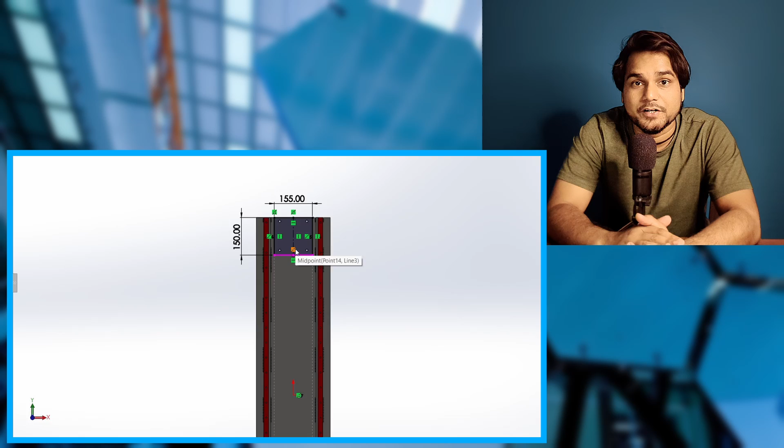Also, we will learn how we can relax the manufacturing tolerance of a ball screw linear actuator to cut down the manufacturing cost, because maintaining a close manufacturing tolerance for a long linear actuator base plate like 1 meter is challenging. And on top of that, we will learn how to design, or we can say where to design, a customized coupling, or we can say floating joint, for a ball screw in a linear actuator.

And now we are in Solidworks, and these are our linear actuator components as far as we made the selection and design.

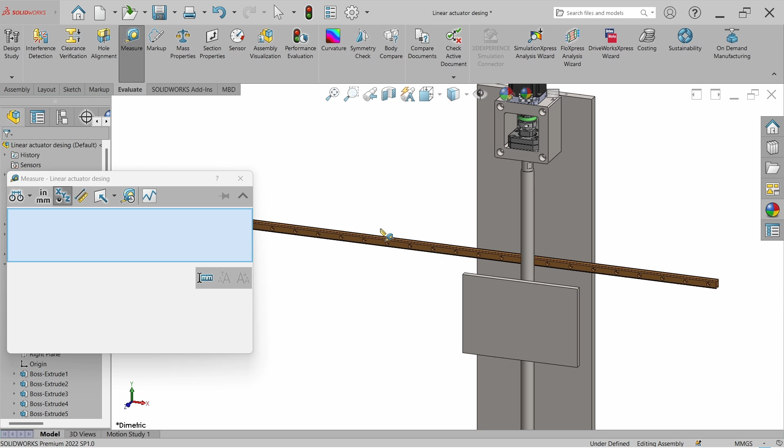And now let's bring the LM guide and blocks. So go to the assembly, go to insert component and select LM rails and bring it into the assembly. And here I have downloaded the rail length 1420, and I have considered some extra length.

Why? Because I wanted the last hole of the rail to be at the same distance from the sides. This is 20 mm, and also at this side this mounting hole is at a distance of 20 mm from this side. And the benefit will be we can mount this rail in both orientations, like this or like this, and this is just a very small advice.

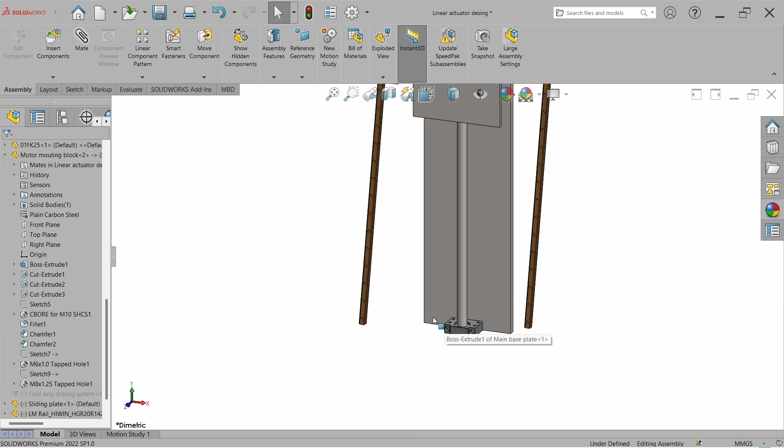And now let's make a copy of it because we are going to use two rails. And now let's bring the LM block right here, and let's try to assemble this linear motion guide and block into this assembly. So we have to mount this rail with the base plate, and we have to mount this LM block with the sliding plate.

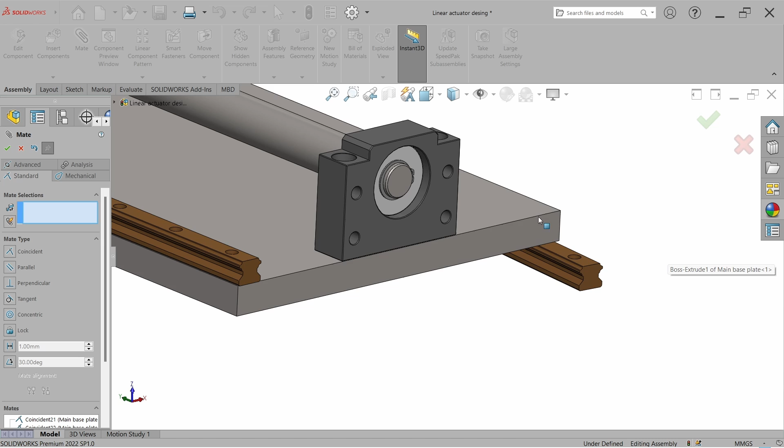So go to mate and select the top face of the base plate and select the resting face of the LM guide and hit OK. Just position it. So just temporarily I am mating this and hit OK. Also do the same at this end. Also temporarily mate this, just one block, but there is a gap.

And we cannot bring this sliding plate down because this sliding plate is to be mounted with this ball screw nut, something like this. So there are two options. The first option is we can bring the LM block down and assemble it with this rail, and we can design a spacer here, something like this, at both sides. And the second option is we can mount this LM guide at the top, and to do that we have to design a spacer below the LM guide. Another question is which option is better.

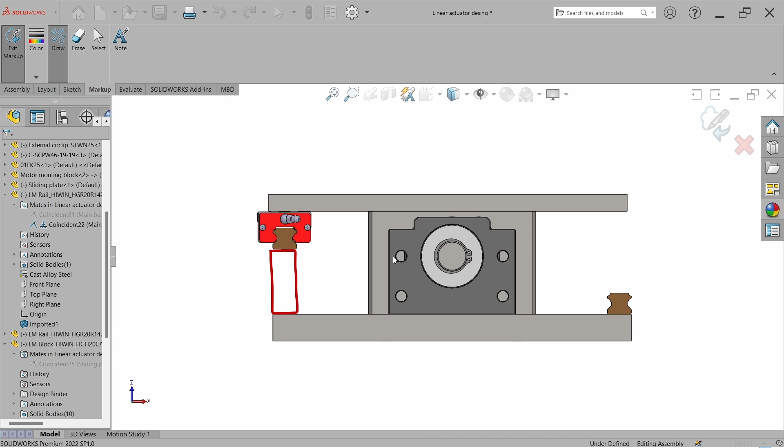So first let's try to understand it. As the first option is, we will design a spacer right here above the block, mount the sliding plate with this spacer and mount this LM block with this spacer. So what is happening here, we are increasing the cantilever distance from the load, and it will apply a high amount of moment over this LM block that can reduce the life of the LM block.

And now let's look at the second option. The second option is we have to design a spacer below the LM guide. And when we do that, the cantilever load will be minimum and it will apply the minimum moment over the LM guide block. So we will go with the second option. We will design a height spacer below the LM rail.

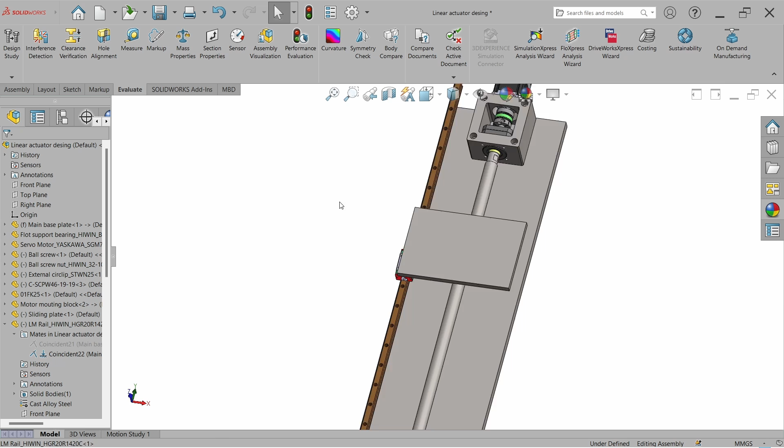So how to design a height adjustment spacer, or we can say height adjustment block, for the linear motion guide. There are a variety of methods to mount the LM rail with the base plate. You can check out the catalog for more detail. But in general, we will design the height adjustment block something like this.

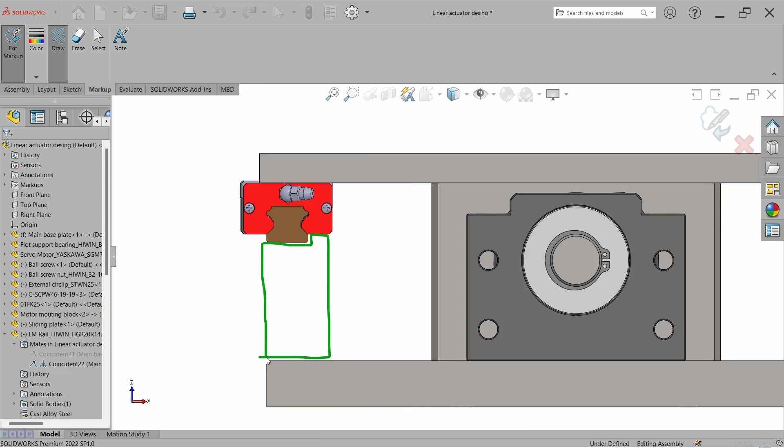We will maintain this resting height to the base plate very accurately, and we will give an edge here, something like this, so that we can mount this rail by butting it on this edge.

So that we can accurately maintain the distance between both LM rails. I hope you get my point. Otherwise, if you will not use that kind of height adjustment block, maintaining a high accuracy parallelism between both linear motion guides will be difficult, because the LM guide does not come with dowel holes, it comes with clearance holes.

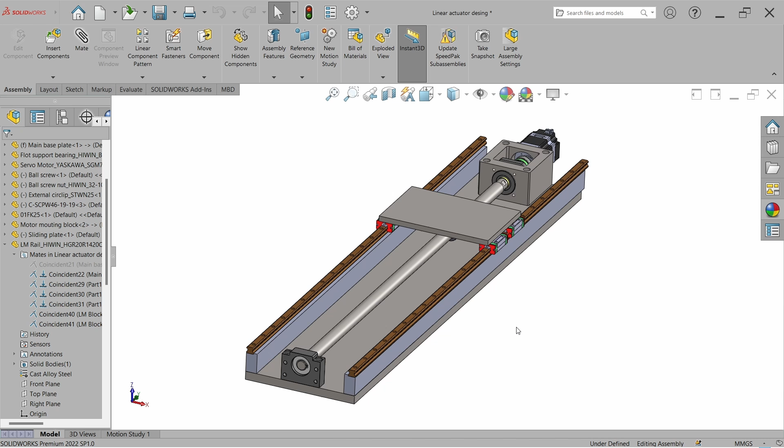And there is one more thing. When we design that kind of height adjusting spacer block, we will need to mount this block with the base plate using dowel pins. Otherwise, the distance between rails will not be accurately controlled. Or we can make the cut like this and place the height adjusting block against the edges.

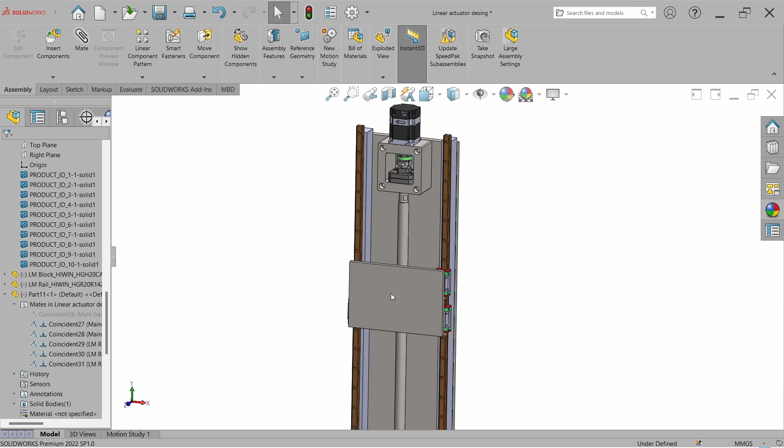And these two methods are costly because the length of the LM guide is more than a meter, and machining such a height adjustment block in one part is difficult. However, we can divide this height adjusting plate into multiple parts, but again, the cost will not reduce. So now let's talk about the solution.

And the solution is, instead of using these separate blocks, first we can weld two simple bars without machining over this base plate at both sides. Something like this. There will be a welding. Also, we will do the welding on this side. And these blocks are just raw blocks. There is no machining. We don't have to do any machining on this plate before the welding.

And after the welding, we will place this welded structure on a milling machine or VMC machine, and then we can machine this edge in one setup. Makes sense? In this way, we don't have to use any dowel pin. We don't have to use any edge step here on the base plate. Also, we don't have to machine every part individually. We just have to first weld these parts together and then machine only the resting part of the LM guide.

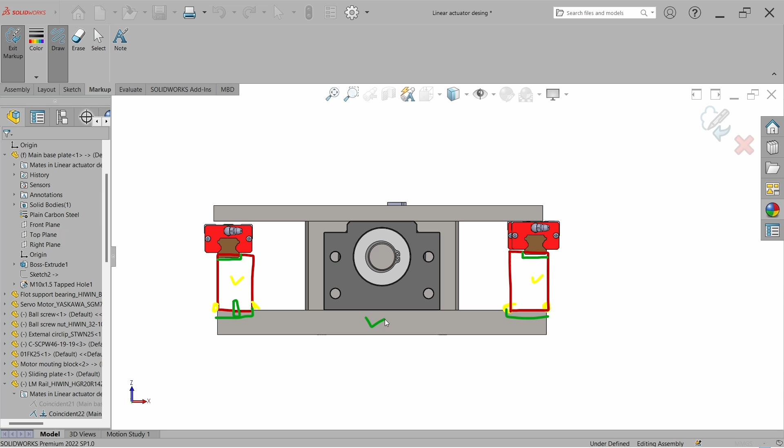So now let's try to make this base plate with these welded bars. Just open the base plate. As for the mounting holes we did in the previous part of the series, we don't have to do it before welding. Just for demonstration, I'm suppressing this. Now take a sketch on this plate, go to the corner rectangle tool, and start from the top and end it at the bottom at both sides.

And now go to the smart dimension and set the width of this plate to 30 mm. Why? Because the LM width is 20 mm, so we can leave the edge width to 10 mm, or you can go for 28. It's all up to you. And now just make them equal.

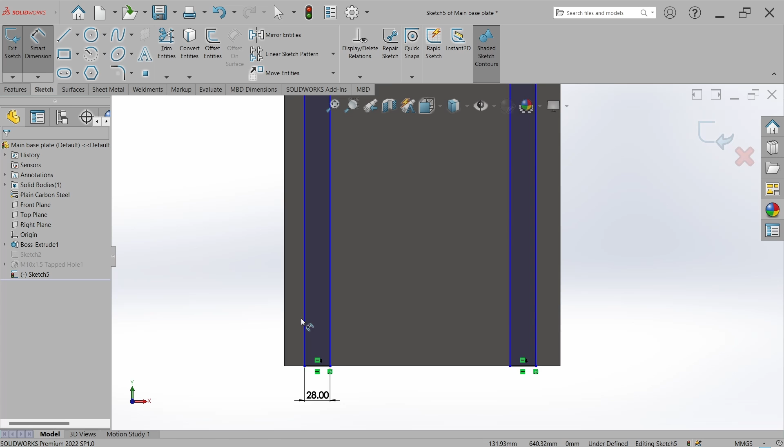Now, we have to leave some space here so we can weld the edges from both sides. Also, we will make the mounting bolts on this base plate so we can mount this whole system on a structure. So go to the smart dimension and set this gap to 30 mm. It's up to you, and again set it to 30 mm.

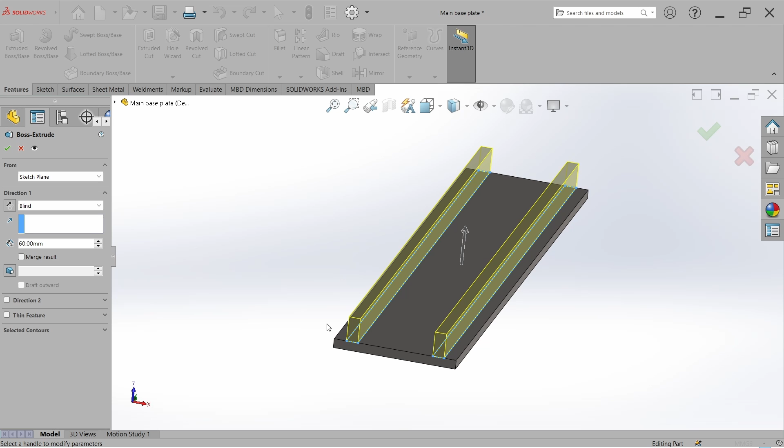Close the sketch, go to features, extruded boss, and set it to blind. For now, I am taking it to 60 mm. We will adjust it later. And here, just uncheck merge result. Otherwise, it will seem like the whole part is manufactured from one raw material. Now hit OK, go to weldments and select weld bead.

Here, select the faces, or you can check both sides, so you will get the welding on both sides. Here we can set the welding size. This is 5 mm, but I don't want continuous welding. I want intermittent welding. So check intermittent welding and pull this bar down. Here we can set the welding length and the gaps. I'm setting the welding length to 50 mm and the gap to 100 mm.

Or you can increase the welding length. Go for 100 and hit OK. But the welds are not showing, so go to the eye button and click on view weld beads. And now the weld beads are showing. Now we have to repeat the same process on this side.

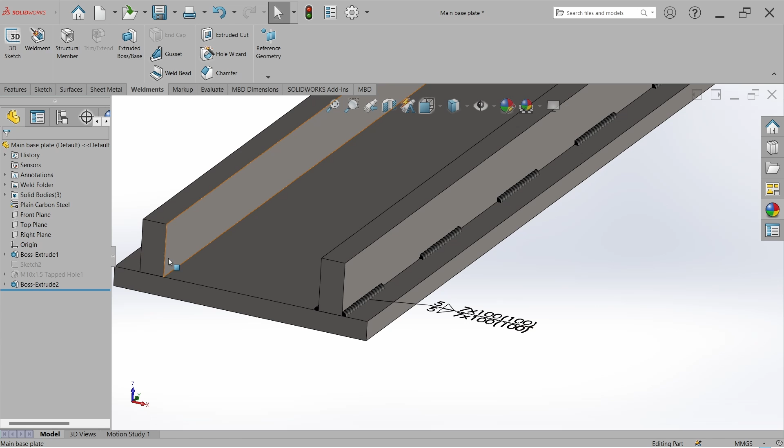But the welding symbols are looking crazy, so double click on it. This is the welding size, this is fine, but this is not a good representation, so take it like 100-100. Also the other side, 100-100. 100 is the length of the welding and 100 is the pitch. You can also change the welding type. This is fillet welding, which is okay for me, and hit OK.

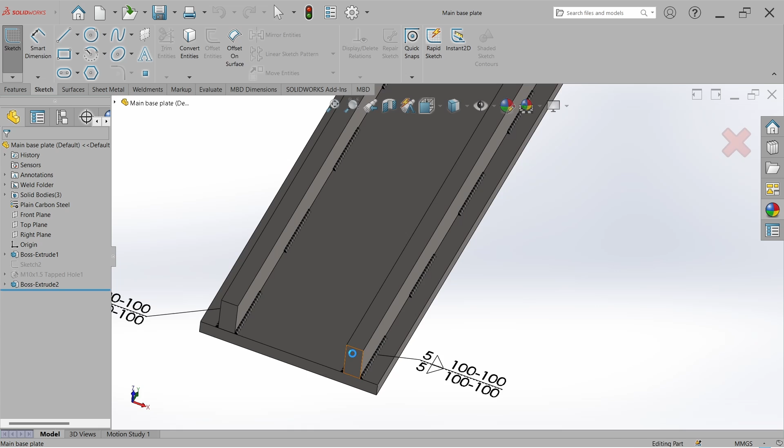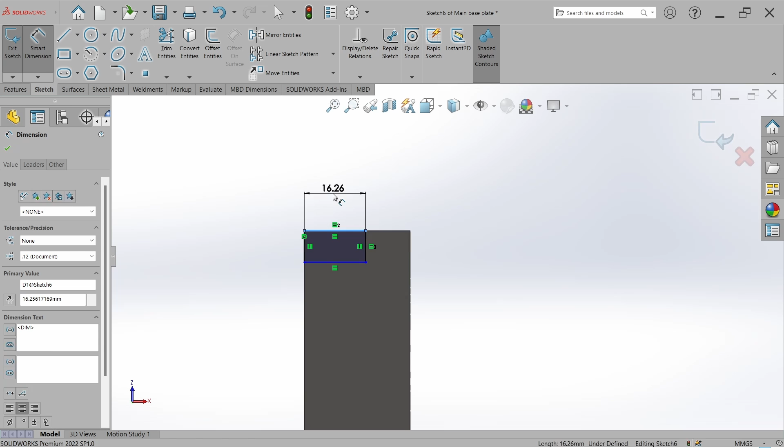Now go back to the assembly. Let's make a step cut here and mount this rail onto the step. Open it, select the face for a sketch, go to the corner rectangle tool, start from this corner, and the same from this corner, and make them equal because they have to be equal. Also make the depth equal, set the length to 20 mm. You can take some extra, it's up to you, and set the depth to 3 mm.

We will check it and adjust it. Close the sketch, go to the feature, go to the extruded cut and set it to through all and hit OK. And now just for identification, I am just changing the color of these faces to red. So it will be an identification that this surface is to be machined, and hit OK.

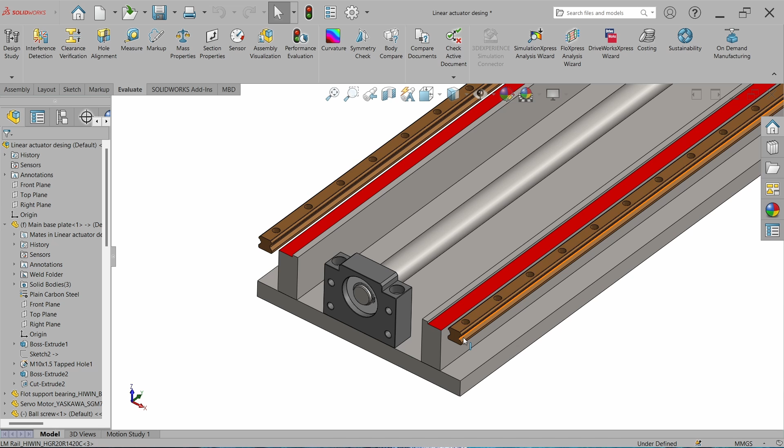And now we can make the mounting threaded holes for the motor mounting block. So here I am just unsuppressing it. And now let's go back to the design. So now we have to mount this rail over this face. So let's first temporarily mate it. So go to the assembly, select the mate and select the faces, coincide this, also coincide this edge and also coincide these faces and hit OK.

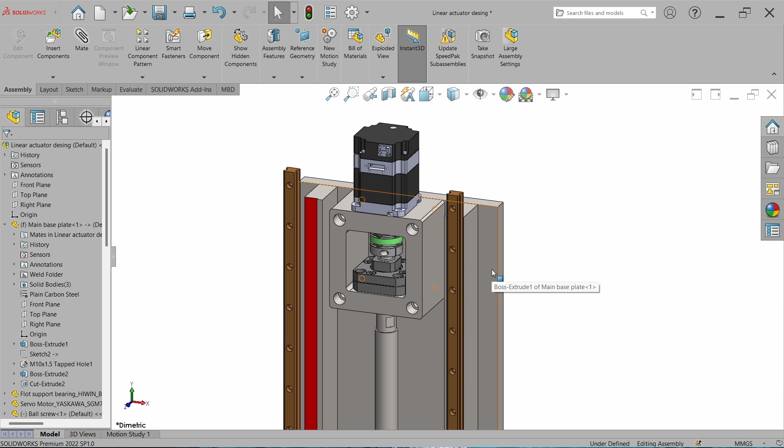And now this rail is extra, so what we can do, we can increase the overall length of this base plate. So first let's measure it, and this is 37 mm. So just double click on it and click on the dimension and add 37 mm and rebuild it. And now there is a problem. The motor mounting plate has been shifted, and there are two problems. The first problem, we have not applied the mate in the mounting holes, and the second problem is the length of the ball screw. We have to extend the length by 37 mm.

So first let's try to mate it properly. So I'm just selecting the part, go to the mate property, and here this mate is the motor mate. This is also for the motor. This is for the parallelity. So let's delete it. We will mount it with the holes. And this mate is for the bearing block. This is also for the bearing block. And this is the parallel mate. We can delete it and we will mate it with the mounting holes. And this is okay. This is also okay.

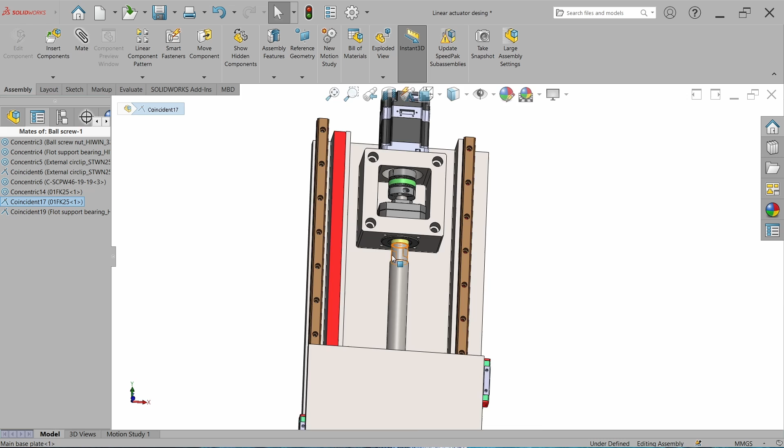Select the ball screw, go to the mate and check it. And this is the face where this is mated. So just temporarily suppress it. And now we can move it around. And now go to the mate and first mate this. Okay, and also mate this hole. We need to mate at least 2 holes. Hit OK. And when we mate, this hole has been shifted.

Why? Because this hole was made from external reference, and you can also see this symbol. This symbol is for external reference, and sometimes it might be a reason for making mistakes. So always try to make the holes with the external reference and then break the external reference and give them dimensions. So let's try to do it. So as we know, this hole is started from this face at a distance of 15 mm. So what we will do, we will open the part and go to this sketch, select the sketch and edit the sketch. And now we can see these points are external reference.

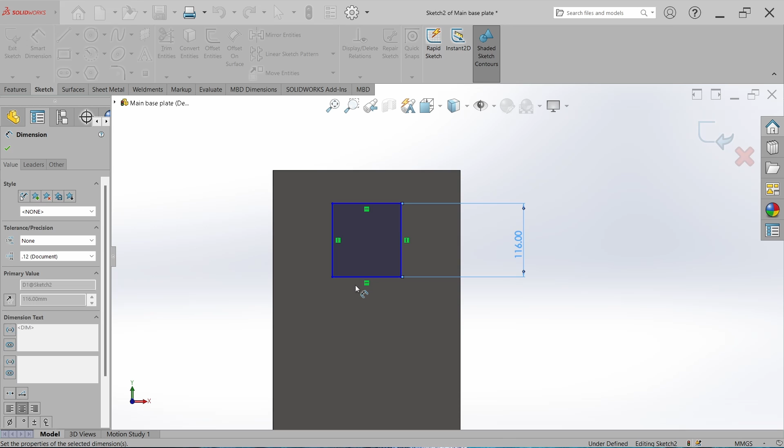So first just delete the points. Okay. And now go to the smart dimension and first set the dimensions as it is. You don't have to change anything. And now go to the line and select center line and start from this center point and mate it with the center point. And now again go to the smart dimension and now set it to 15 mm. And now close the sketch. And now there was an arrow and now this is removed because there is no external reference. Go back to the assembly.

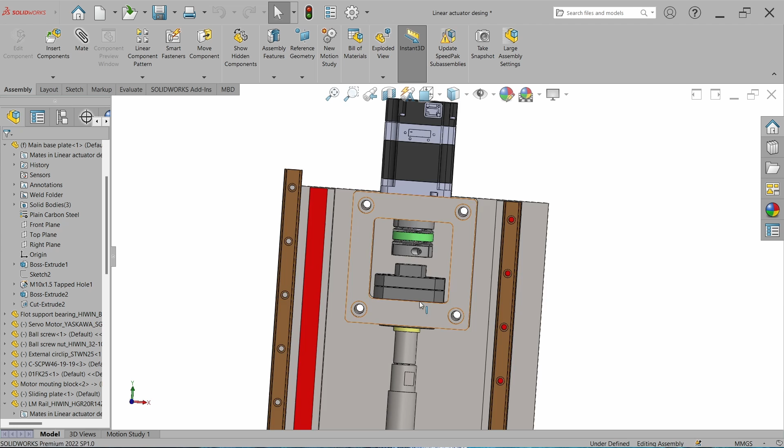And now this is perfectly fine. And now just try to move it. This will not be moved because this is completely constrained. And now we can also constrain these things. So go to the mate and select the holes. Hit OK. Again do the same. And now these parts are completely constrained. And now we have to increase the length of the ball screw. So just double click on it and select the dimension and plus 37 mm and just rebuild it. And now this is perfectly fine.

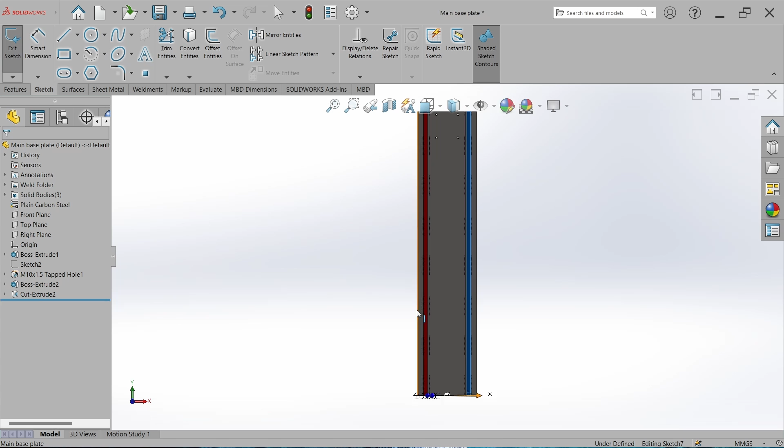And now we have to mount this rail over this plate. So just open it and go to a sketch. And if this is disturbing, you can just hide it. Right click on it and hide it. Okay. Now go to the sketch and select this face and go to the center line and start from the middle because the width of this face is the same as the width of the LM rail. If it were not, then I would start by giving the distance from this edge because we have to align the guide with this edge.

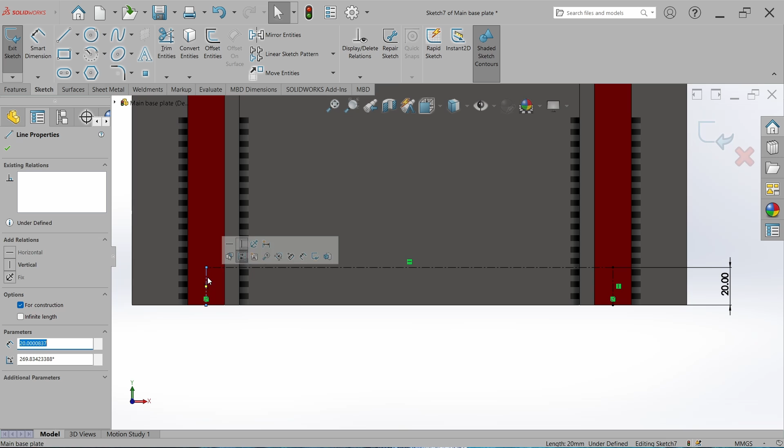And now we can set the distance of 20 mm. 20 mm is the distance of the first hole of the LM rail from one side, and make this vertical. Go to the sketch, go to the feature, go to the hole wizard, and the size of the mounting hole of the rail is 6 mm. Clearance hole diameter is 6 mm. It means we have to use an M5 bolt.

So go to the threaded hole and select the thread size M5, pull this bar down and select it to blind, and set the depth to 20 mm and thread length to 16 mm. Go to the position, 3D sketch, just mark the location and hit OK. And now just hide the sketch.

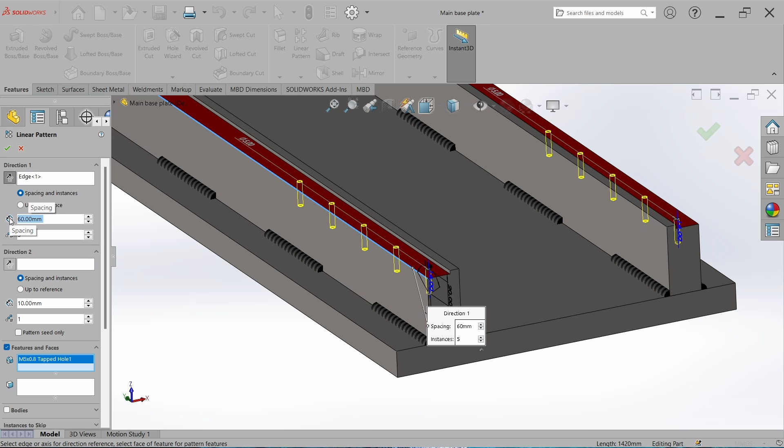Go to the linear pattern and select the pattern direction. I'm selecting this edge. Go to the feature and select the threaded hole. You only have to select one threaded hole because we made both holes at the same time. And now we have to set the pitch of the LM guide mounting holes, and LM guide mounting holes generally come with 60 mm of pitch. And now we can just increase the number of holes, and this is OK, hit OK.

Now just go back to the assembly. Select the part, go to the property, and you can just delete the temporary element, and just try to mate this with the mounting holes. So go to the mate, select the clearance hole and the threaded hole and hit OK. And now we have to mate one more bolt and we can rest it properly. This is cool. And just repeat it on the other side also.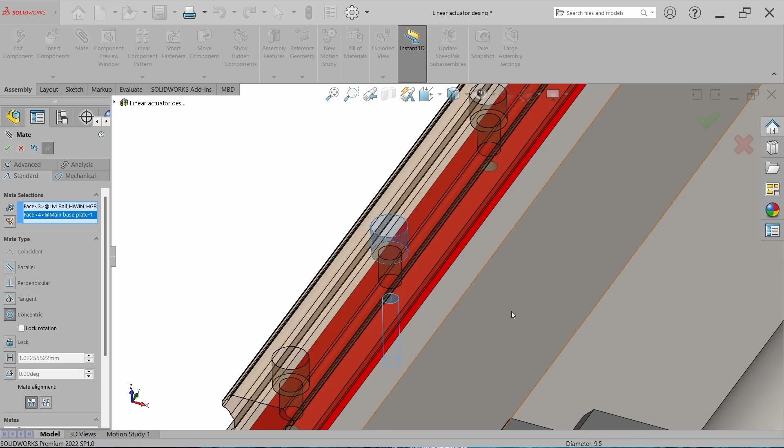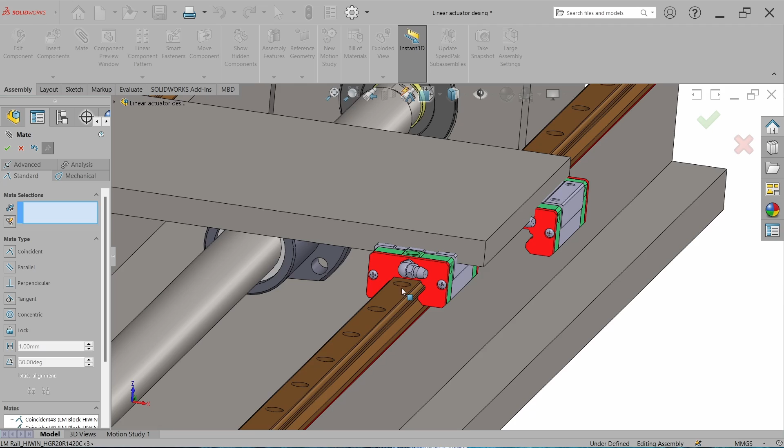And now let's try to mate this mounting block onto the rail. So go to the mate and select the top face and the top face of the rail, and one of the side faces, and mate it with the appropriate face and hit OK. And now just repeat the same process for all the blocks.

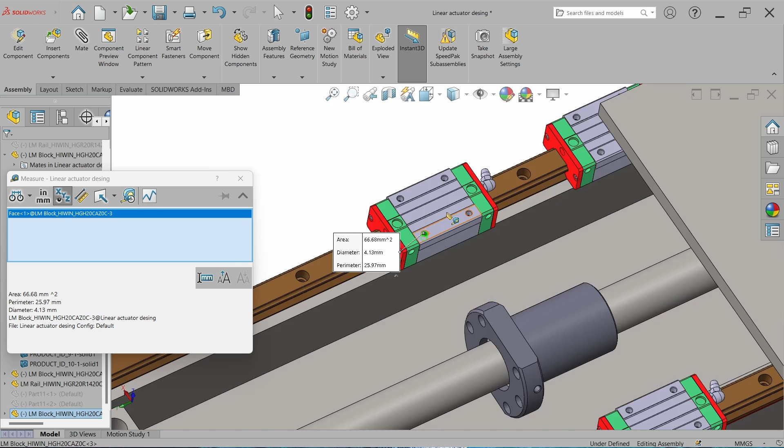And now we have to mount these blocks with this sliding plate. So first let's measure the mounting CD and the size of the threaded hole. The threaded hole size is M5 because the diameter is 4.13 mm. We can also check the catalog. And the center distance from one hole to the other is 32 and this one is 36. And from one side this is approximately 20, and from this end side to this end side, the distance is 188 mm.

So let's open this part, go to the sketch, select this face, and first take the center rectangle tool and start from the origin. Now select the complete rectangle and convert it into construction lines. Now go to the rectangle tool and select the corner rectangle tool. Oops. And start from the corners. Now make the center distances equal, and make these center distances horizontally equal. Go to the smart dimension and set this distance to 32 mm and the vertical CD to 36 mm.

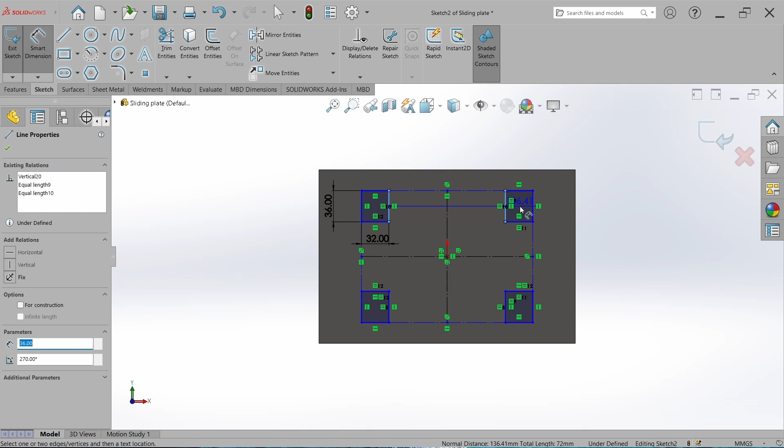And as we measured, the inner center distance of two blocks from hole to hole was 188 mm. So set it to 188 mm, and this side was approximately 20. So here I am setting it to 25 mm. This is up to you. You can set it to 30 mm also.

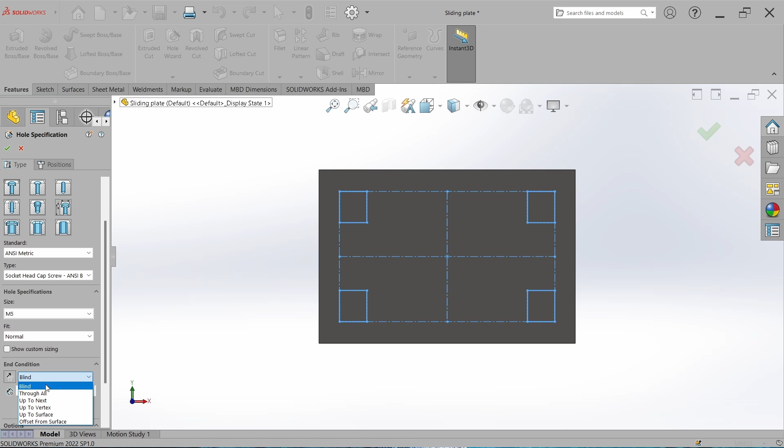Now close the sketch, go to the feature, go to the hole wizard and select counterbore. Why? Because on top of the plate we will place our drilling system, so the bolt should not be on the face of this plate. So here select the socket head cap screw, size M5 is already selected, and set it to through all. Go to the position, go to the 3D sketch and make the holes at all the corners at once. Hit OK. And now we can also add some chamfers just to give them a good aesthetic.

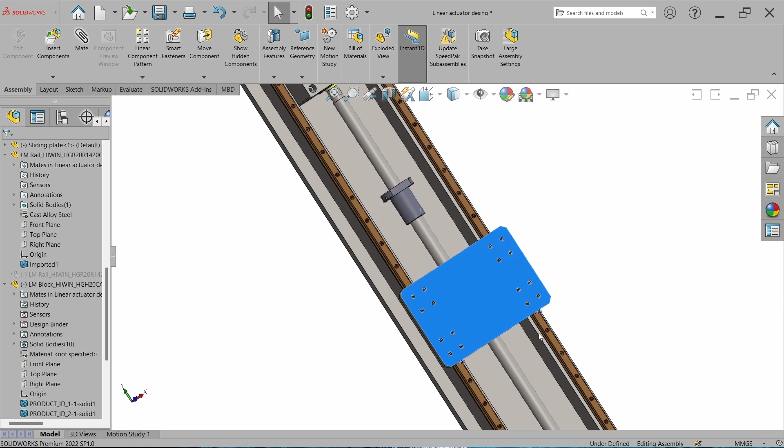And now just go back to the assembly and now we can mate this. So go to the mate and select the clearance hole and the block hole. And now have a look. This is completely fine. And here is a thing: if you assemble these blocks onto the rails and accidentally a block falls, their balls can be lost.

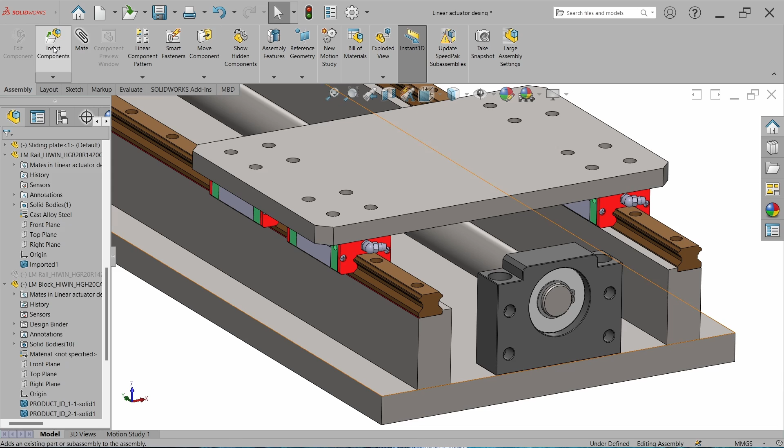So what we can do, we can add some stoppers here. To save time, I have already designed this block. This is very simple. So just go to insert component and bring the LM stopper block. We can mount this block over this height adjustment block, something like this. I'm just temporarily mating it. You can take your time, make the thread on it and assemble it.

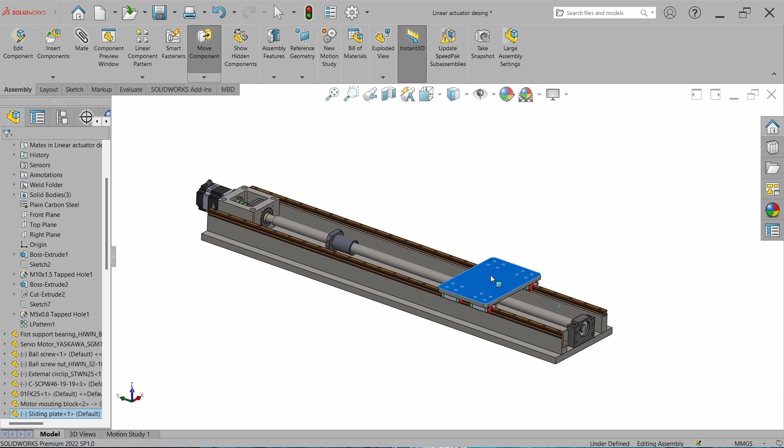In manufacturing, we have to make the threaded hole manually because we cannot make the holes of a 1 meter long block vertically. And making the hole manually in that condition is quite simple. This stopper is not for stopping the movement. It is only for preventing the blocks from coming out of the rail during assembly, because we will stop the slider with the ball screw and the servo motor. So now we just have to replicate this at all 4 corners.

And there is one more thing. To ensure that the LM rail will always align with this step, we can add the rail locking plate. Let's see how. So let's bring the locking plate. I have downloaded it. It comes in a standard size, or you can manufacture it as well. So just open it and bring it into the assembly.

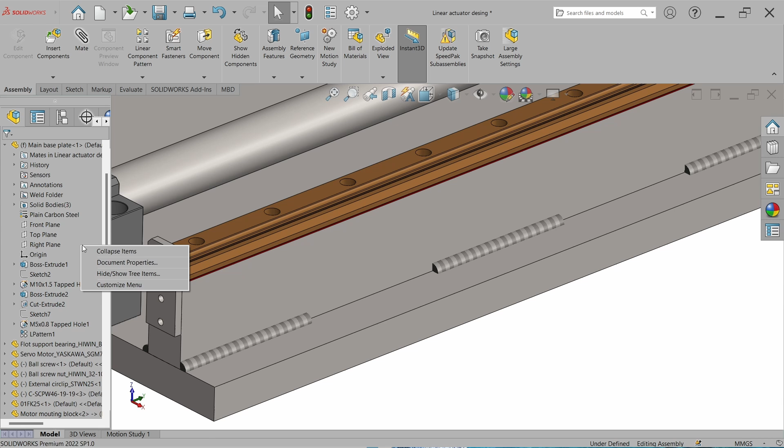And now just rotate it. And I'm temporarily mating this. Oops. Okay. Something like this. So what we will do, we will make the threaded hole over this plate and we will tighten this locking plate with the bolts.

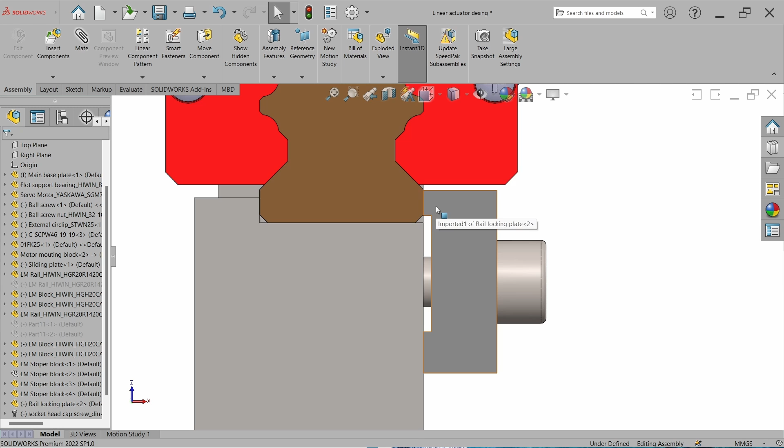Something like this. So when we tighten this bolt, because there is a cut, let me take it to normal view and just hide it for this instance. When we tighten the bolt, this block will start pushing this LM rail, and it will ensure this rail will always be aligned with this step. I hope you get my point.

And you can assemble this at a gap of 300 or 400. I'm leaving this up to you. And now I want your closer attention. As I said, we will take the raw material pieces and weld them together, and after that we will machine this step for the LM guide, and we can maintain these faces and this level in one set of machining, and also maintain the close tolerance between these steps.

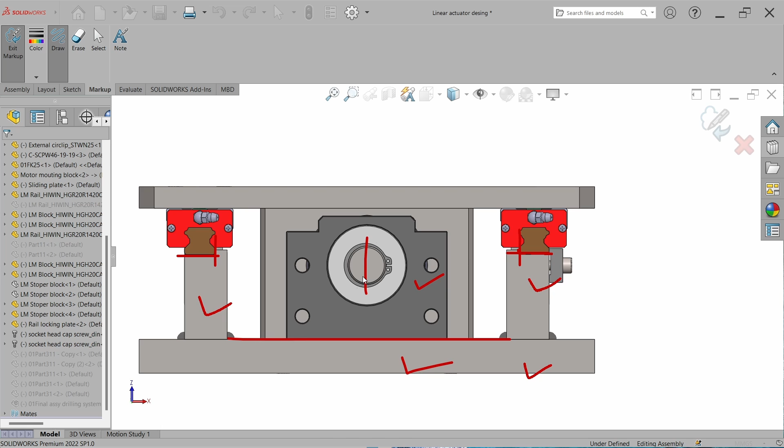This is totally fine, but there is a problem. Because this plate is a raw material plate with a rough grinding finish, we also have to machine these faces, because our bearing arrangements are mounted on these faces. So we also have to maintain the close tolerance between the ball screw center line and these faces, this face height, and the distance from the LM rail to the center of the ball screw.

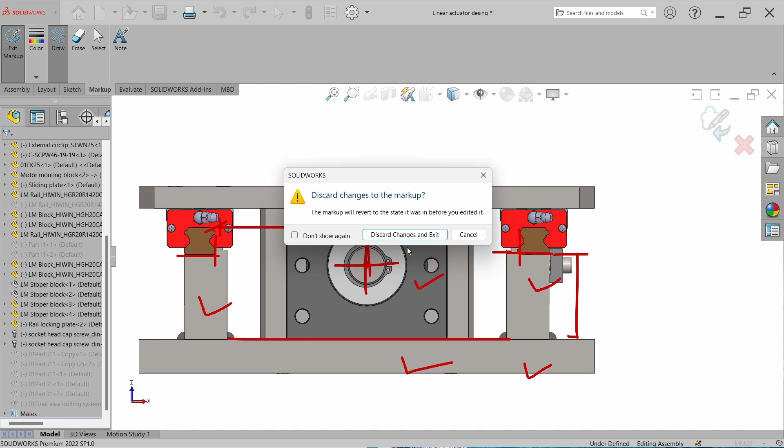So how can we do that? We have to machine the resting face. So there are two options. Either we can machine the complete plate throughout the length, or we can only machine the bearing mounting or bearing resting face, like here and also here, something like this. We don't have to machine all over the faces. So let's try to do it.

If you are a beginner, or maybe a student following my design from the start, you might get angry with me: why didn't I start the design with the welded structure, why did I first design the simple plate and change the design at the end? And I completely agree with you, because I already knew it start to end. When I was recording, the final design was on the thumbnail of the first video, meaning I recorded all 10 parts at once.

But the thing is, I'm not making this kind of video just to give you information, just to transfer the experience to you. It is not only that. I'm making the videos in such a way that you can feel the problems at every step. You will start with a very obvious thing, and I want you to start with the very obvious thing. You don't have to think a lot when you are starting. Just start with a very obvious thing and go step by step. And at every step, feel the problem, analyze the problem, and then correct it.

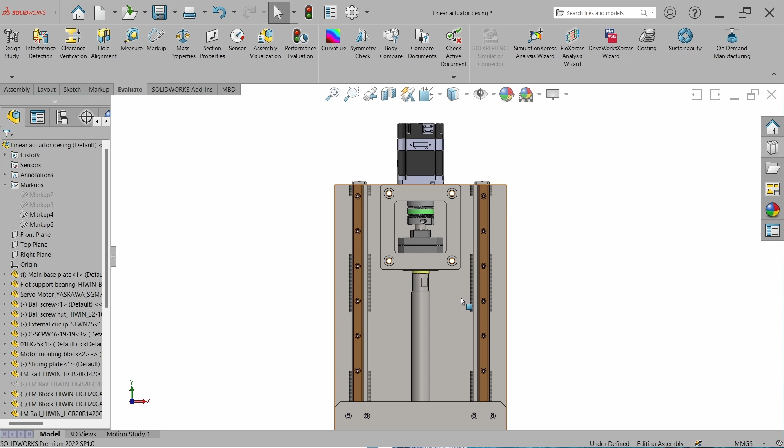So just select the part and edit the part. Go to the sketch, select this face, select the rectangle tool and roughly draw something like this. Also at that side something like this. Just close the sketch and open it. Go to the sketch and edit the sketch, and here select a center line. Select this face center line and this point, make them center and set the distance to 155 mm. This is up to you. You can also set it to 150 mm.

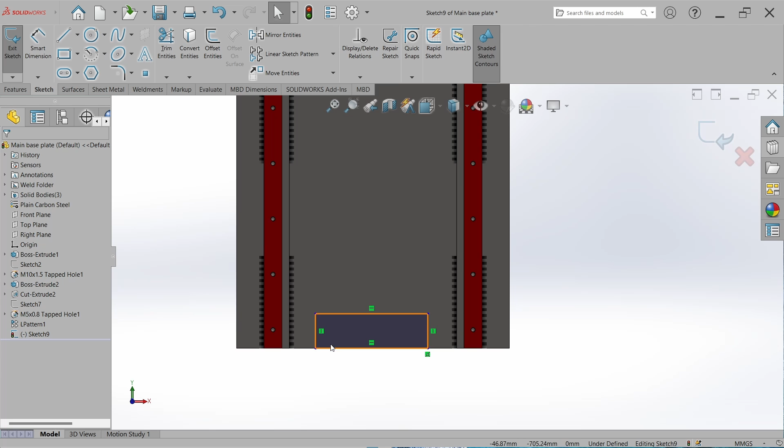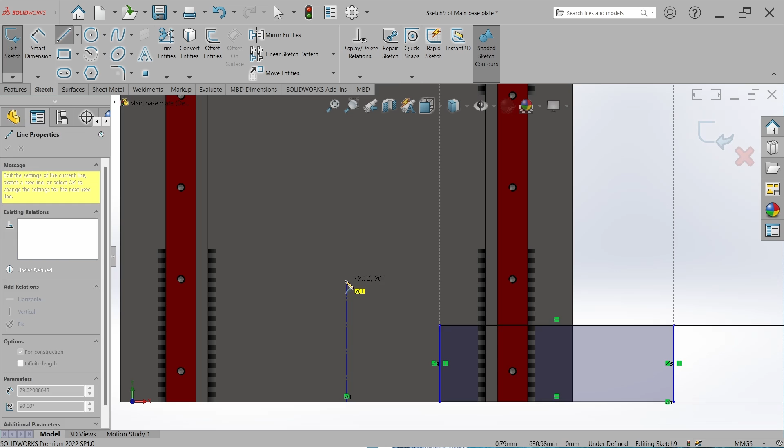And here I will just align the lines, make them collinear. Also this side, make them collinear. This is not necessary, I'm just doing it to look symmetrical. And we can set this dimension to 50 mm, but this is not in center. So for now place it at the side, take a center line, start from the origin, bring it right here, select this point and this line, and make them midpoint. And now this is completely fine.

Close the sketch, go to the feature, go to the extruded cut. Oops. First select the sketch, then go to the extruded cut, so it will automatically select the area. And here I'm taking it to 2 mm. It's up to you, you can go for 3 mm also, and hit OK. And now we can add some fillet here, something like this, also at this side. But there is no threaded hole, so we have to add the threaded hole for the Flot bearing also. Now just hit OK and go back to the assembly.

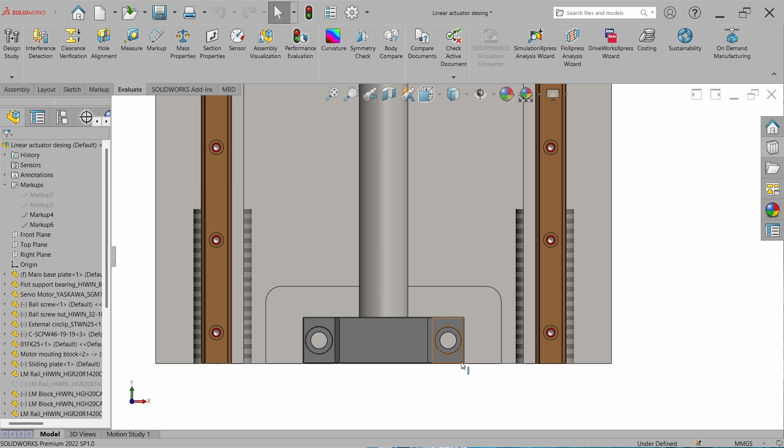And now just try to add the threaded hole here. So just measure the clearance hole size. This is 11 mm, so it will be M10 bolt size. The center distance is 85 mm, and from the side this is 15 mm. So just open it, go to the sketch, take the sketch right here and go to the center line. Start from center, go for both sides and make them equal. Go to the smart dimension and set it to 85. Also set this dimension to 15 mm.

Close the sketch, go to the feature, go to the hole wizard, go to the threaded hole, select the threaded hole M10, and now go to the position, mark the hole positions and hit OK. Hide the sketch. Go back to the assembly, and now we can just make these holes.

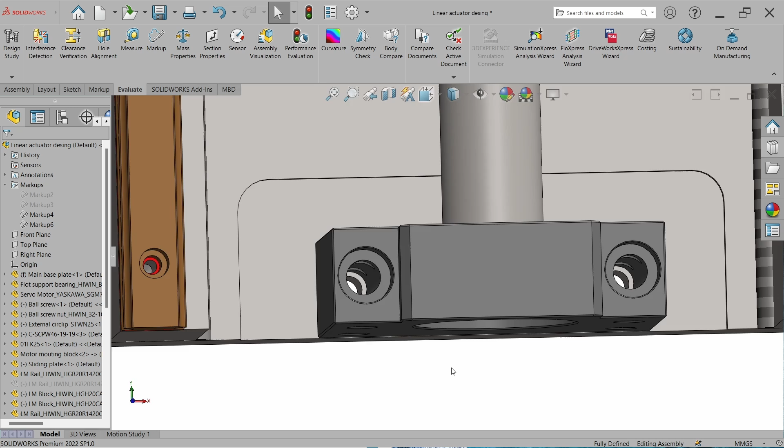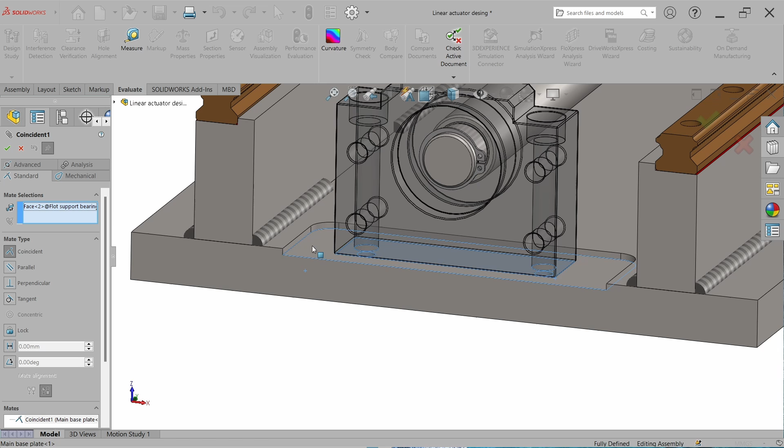Okay. Now as we made these bearing blocks with this surface, we have to change the mate to this first surface. So how to do that? Select the part, go to the property manager, find that mate and edit the feature. You just have to delete the face and select the new face, but it will give an error because the first bearing block, the fixed bearing block, is mated with the top face, and the ball screw is connecting these bearing blocks. So just don't worry, add this mate and hit OK.

And select this bearing mounting block, go to the mate and select that mate, and you can change it here. Just select it, delete it, select this face and hit OK. Now the error is gone. Okay, now let's move to the second step.

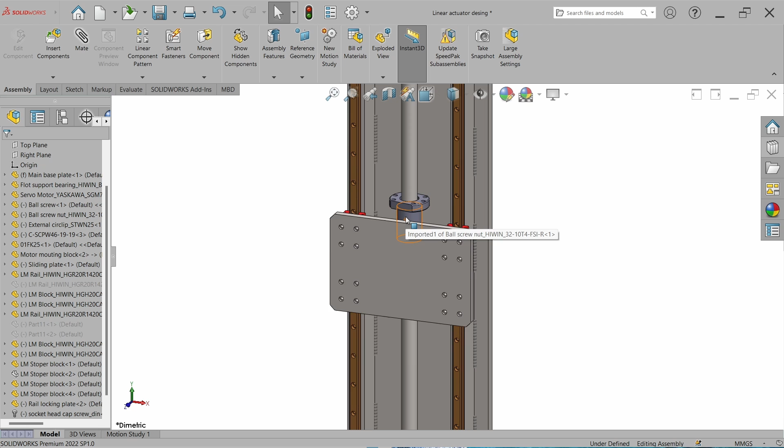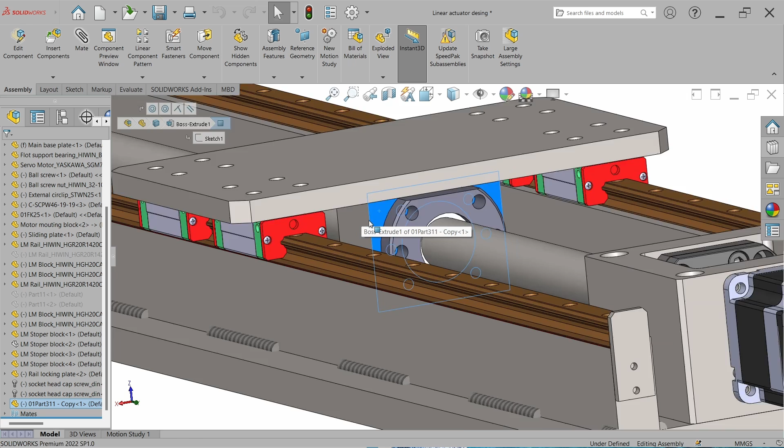Our next step is to assemble the sliding plate with the ball screw. To assemble this, the first option we have is very simple. We can design a block something like this, and we can simply mount this block with the ball screw nut, and mount this block with the sliding plate with 4 screws. So when the motor starts rotating, the screw will start rotating, and the screw's rotational motion will be converted into linear motion because of the nut screw mechanism.

But there is a thing, we have to maintain the perfect alignment of this ball screw center line with these 2 guides. And the ball screw alignment is controlled by the motor mounting block and this support bearing block. So we have to ensure that these bearing blocks are perfectly in between these rails.

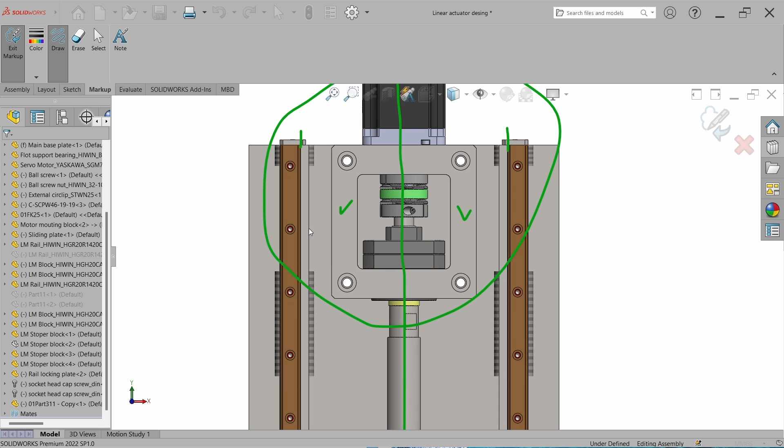And in order to do that, we have to maintain a close tolerance relation between this bearing block mounting and the rail mounting structures. And if the ball screw would be a precise type, this is the ground ball screw, then we have to maintain closer tolerances and the manufacturing cost can be higher. So in order to overcome this problem, we can design a coupling here, but there is also a drawback of this coupling that we will discuss later. But let's first understand how we can design it.

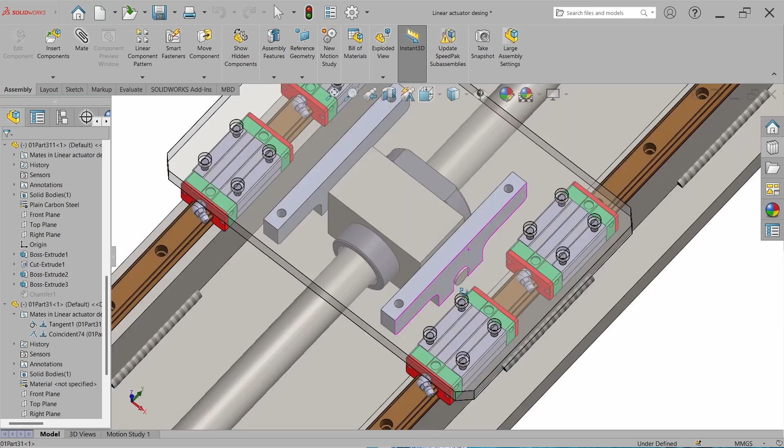So at the very first, we will take the same simple block, and then we can add the pins on both sides, and we can assemble this with the ball screw nut, something like this. And after that, we can attach this type of machined plate with this sliding plate. So let's see what is happening here. So I'm taking a cross section.

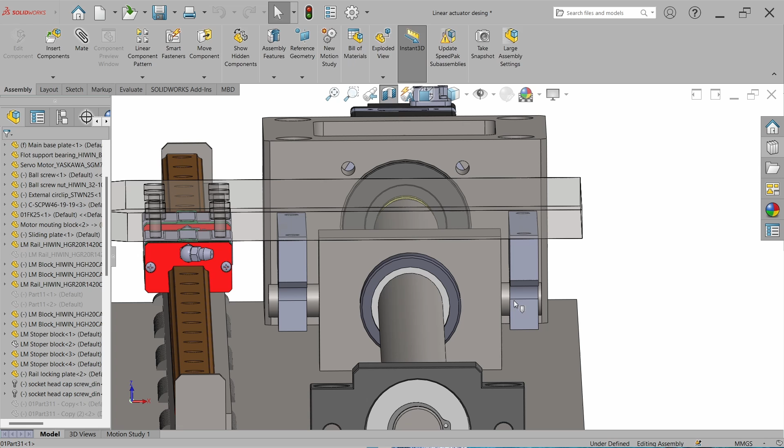And now this ball screw nut is not directly connected with the sliding plate. This is connecting through a mechanism, and in this mechanism we are giving a space to the ball screw system so that the ball screw nut can be moved in lateral space. So if our ball screw bearing arrangements do not make perfect alignment with the LM rails, there is no problem. We are giving a tolerance, a relaxing tolerance.

And in the vertical direction, here I am not giving any clearance. This pin is perfectly into this slot at both sides. But if you want to give relaxation in the vertical direction too, you can give a clearance here. So just double click on it, and let's say we want to give 1 mm of clearance. So just minus it by 1 mm and rebuild it. So there is a clearance, meaning our ball screw and our rail mounting height adjustment block have a relaxation in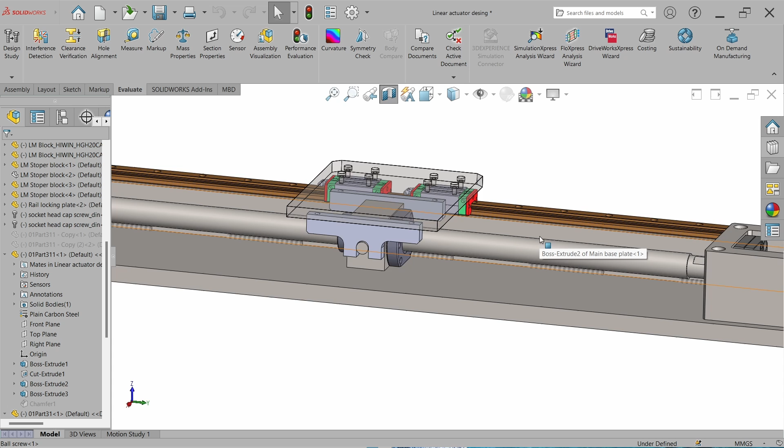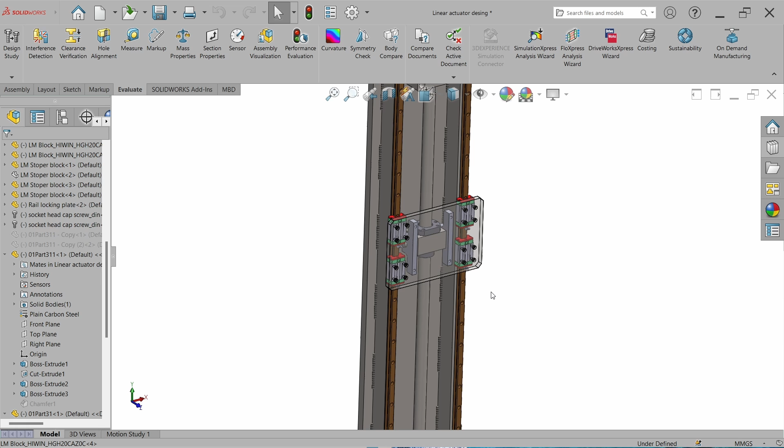maintaining a close tolerance. But there is a drawback, and the drawback is the backlash. If you give a clearance here, this will add a backlash value, because first the ball screw nut will rotate by some angle, and then this will touch this plate, and then the sliding plate will start moving. I hope you get my point. But in the vertical condition, where our sliding plate will always be preloaded, this backlash will be eliminated. But in the horizontal condition, there might be a problem. So in that case, where backlash is not too important, you can apply this method.

And here I show you what the advantage and the disadvantage are. You can use this kind of coupling just to relax the manufacturing tolerance and save your cost. And the disadvantage is that it will add some backlash.

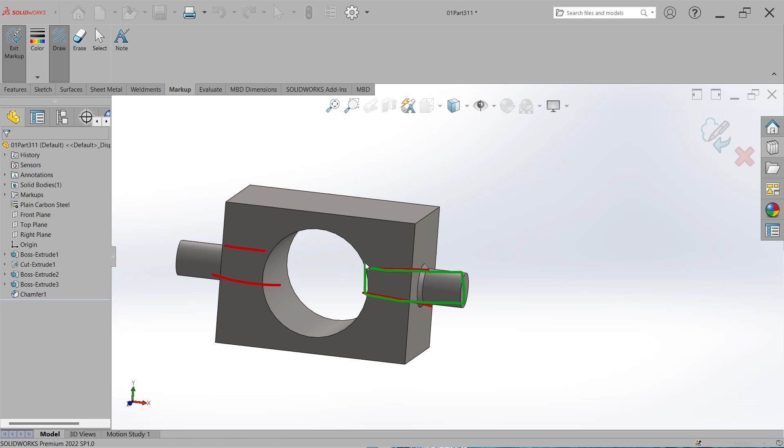But there is a thing that I want you to know. If you are going to add a pin like this, you have to add the chamfers here. Otherwise the stress distribution will not be uniform. And also if you don't want to add the pin, what you can do is make a through hole here and then insert a pin at both sides, and then fix it with the grub screw, or we can say set screw. This is also fine. And there is one more advantage that I would like to explain to you, making this transparent.

And now let's suppose our drilling system is something like this, and this is attached to this plate, and the force of action is here. So this force of action is creating a moment on this sliding plate. And with time, if these guide blocks become loose because of wear and tear, the load will start coming on the ball screw, and in that case the ball screw will also face the moment force, and this is not good news for the ball screw. The ball screw can easily wear if you connect it directly with the sliding plate. I hope you get my point.

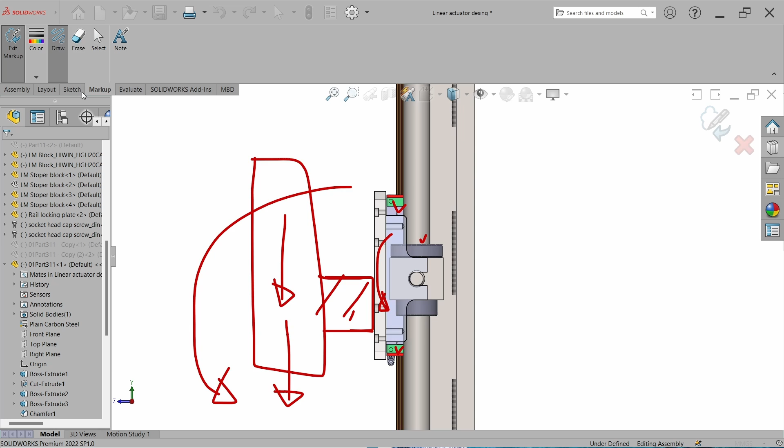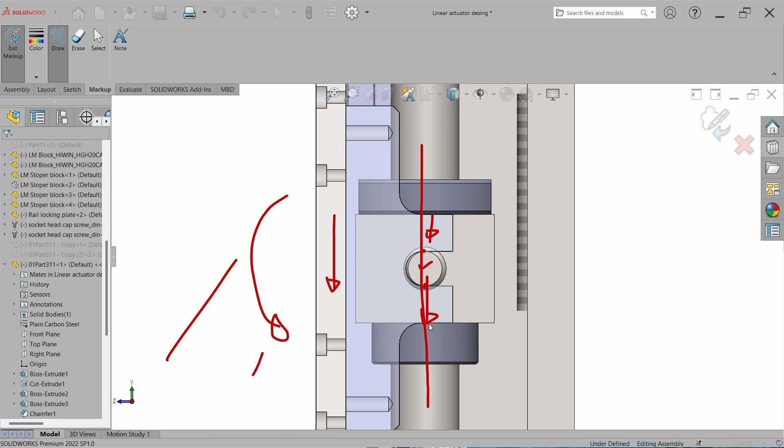But if you are using this kind of arrangement, there is a benefit, because whatever the force on this plate, the force on the ball screw will only come through this pin, and this pin is only touching at these 2 points, which is a line contact in the center of the ball screw nut. So whatever moment there is, there will only be an axial force on the pin, and only this axial force will transfer to the nut. So when you are designing a ball screw system where your loading is far from the axis of the ball screw, you have to use this kind of arrangement. And now just change the transparency, and on top of that we can add our arrangement, our drilling system.

So just bring in the drilling system, select the drilling system, and we can mount this drilling system on this sliding plate. This is super easy, there is no problem. We can mount this somewhere in the middle with this bolting.

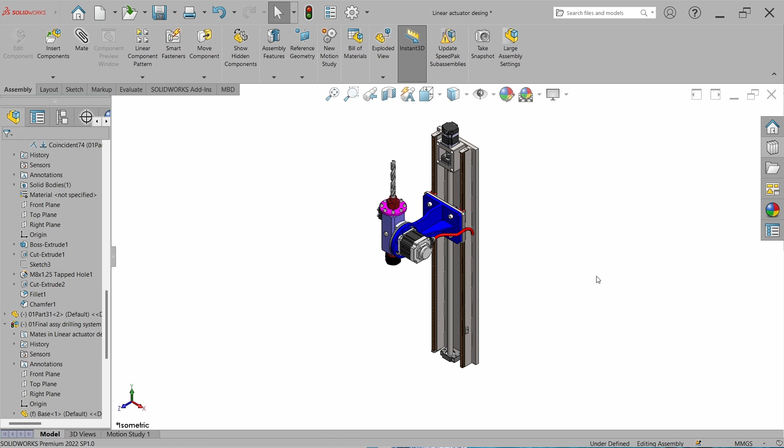And now there is a thing: running our ball screw mechanism within the stroke, we have to use sensors. And what are the sensors? So the first sensor we should definitely add is the homing sensor, so the servo motor can initialize its initial position. So this is the home sensor.

And after that we should also add two extreme position sensors. So whenever there is any problem in the programming, the system cannot pass the extreme positions, and this sensor will act like a safety.

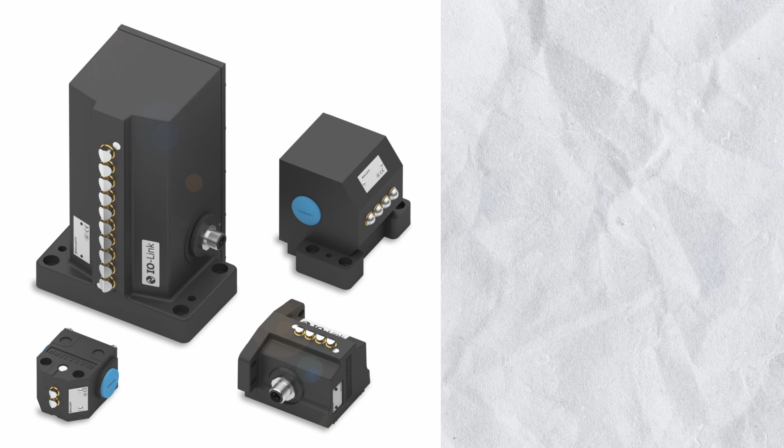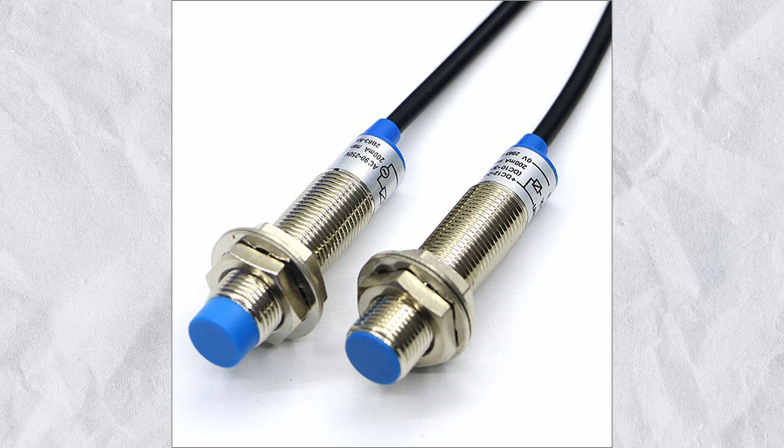And for these sensors we can either use the mechanical multi-position limit switch, if you want to confirm the position at multiple distances, and to use it you will also need the rail dogs for the multiple limit switch, or you can use the simple limit switch. Also you can use the proximity sensor, and also sensors like this, the fork sensor. And for this application I have selected the fork type sensor.

So go to the assembly and select the fork sensor, and here I have already designed the mounting arrangement for the sensor. I have designed a split type of block here. There is a threaded hole at one side of the split cut, and at the other side there is a clearance hole. So when we insert this rectangle bar where we mounted the fork sensor and tighten the nut, this bar will get fixed into it.

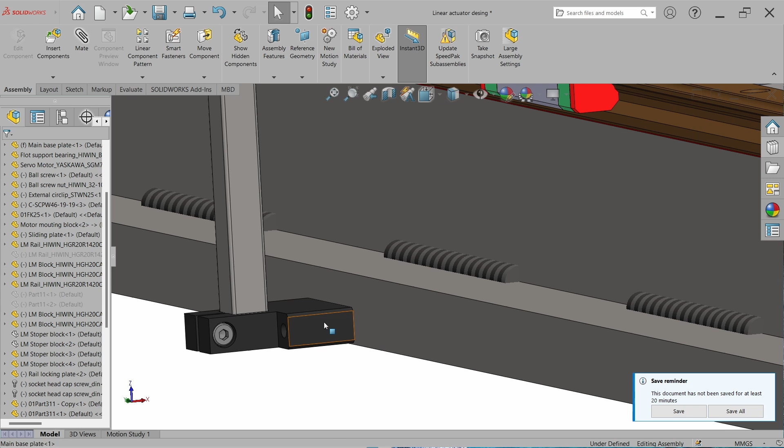So let's temporarily mate it. We will mount it on this face here. I will also leave the design of this bracket in the description so you can study it later. And now we will mount a pin here, or we can say a dog here, which can be sensed by this fork sensor when it passes through this beam.

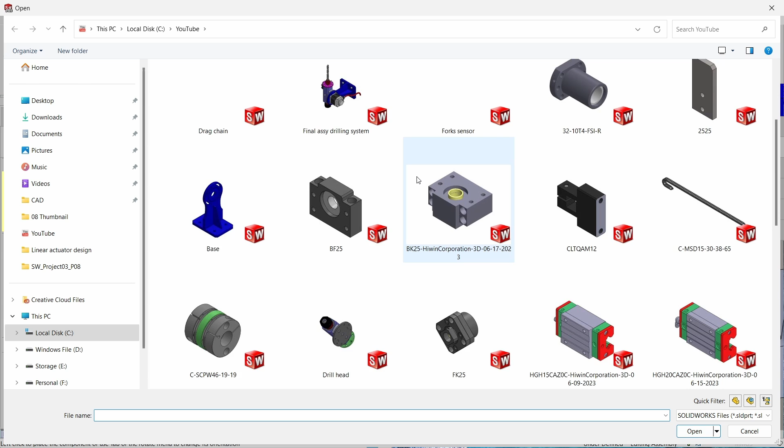So let's see how. Just insert that dog component that I have designed right here, and now try to mate it with this plate in the middle. So when this passes through the fork sensor, there is a light curtain, and this will get disturbed, and this will give the signal to the control system, and then we can either stop or start the servo motor and actuate it accordingly. And this is how the sensor works.

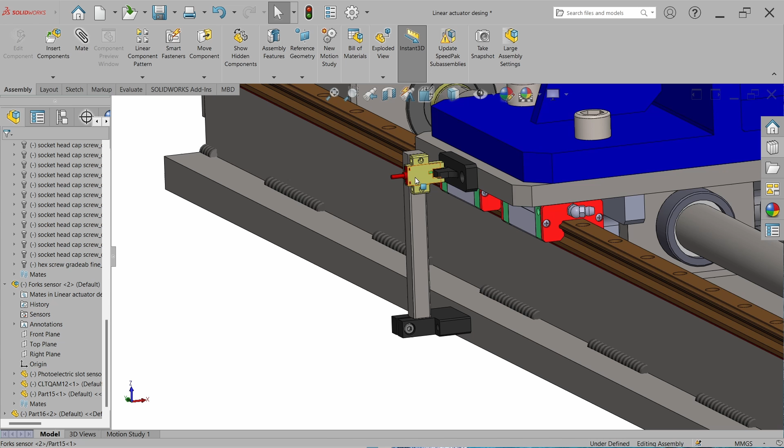But here there is a thing. We can adjust the height of the sensor easily. We will just loosen the bolt and adjust the height, because we have to design a height adjustment mechanism for the sensor mounting, because there can be manufacturing variation and there is not much space. There is a space of 1 mm, and it also depends on the type and model of the sensor. So you have to consider adjustment blocks for the sensor.

If you are using sheet metal sensor brackets, then I would suggest you go for 3 mm or 5 mm thickness, because if you go for 1 mm or 2 mm, whenever there is a physical accident your sensor bracket can be damaged, and as a result of sensor bracket damage there can be a major accident. I hope you get my point. And now we can just replicate it at the 3 positions. I am leaving this up to you.

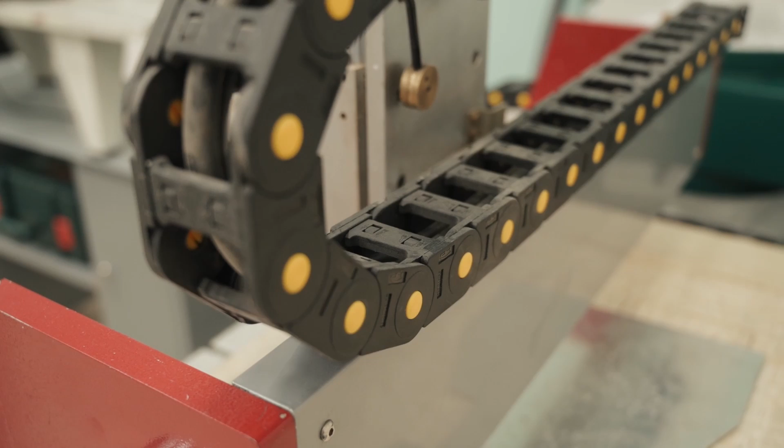Also, for the wire routing, we can use drag chains. So let's bring the drag chain I have already designed and mount this with the plate. Something like this. This motor wire will be connected with this wire. So when this makes the motion, the wire will not get messed up. This is why we use drag chains.

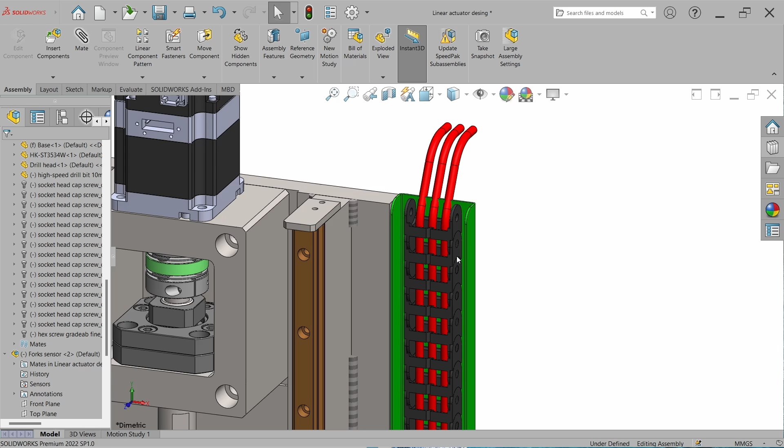These are the links of the chain, and it can bend like this when there is movement. But I would also recommend, when you are using it for a vertical system, use the drag chain tray. You can manufacture it, or you can buy it as a standard product, because this keeps your drag chain perfectly aligned. Congratulations, our linear actuator design has been completed.